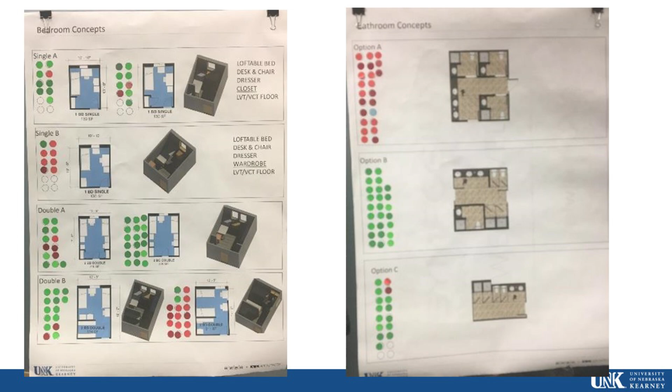This was a good exercise because it gave everyone a voice. I have been in many focus groups where a couple of strong-willed, gregarious people would control the direction of the conversation. Once we do this exercise, it could drastically change from the votes of people who were not talking. Once the votes were in, this would be a good catalyst for conversation.

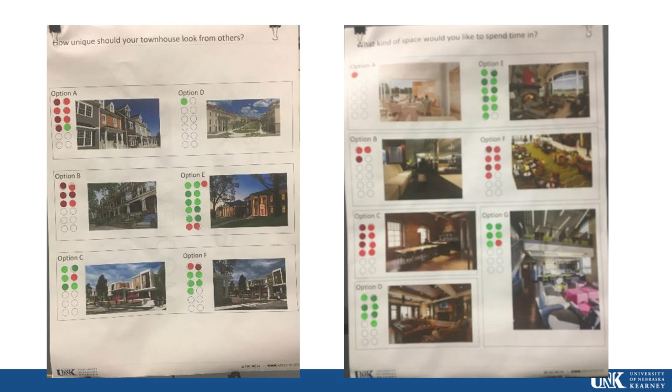The following were the top 5 comments from each of the constituent groups. Each group had their own important issues.

The Pan-Hellenic group was interested in large party opportunities. They wanted a large space for hosting events, and a catering kitchen for dinner parties.

The RHA focus group wanted to avoid having to share bedrooms with non-Greeks. I guess that goes into their exclusivity complaint.

The IFC group wanted to make sure there was adequate storage, going back to the ritual storage and the ability to store construction materials for homecoming floats, etc.

Student government groups weighed in and were interested, as were most, about having a dedicated entry and front porch. The front porch becomes this interstitial space where you can be between the public and your own space - the ultimate see and be seen space.

The housing board was concerned there was ownership of space. People from outside your group should not have the ability to wander through other group spaces.

Finally, the MGC group, which was a smaller minority group, had space for their group and wanted the ability to grow into one of the chapters. This was the incubator for the facility, if you will.

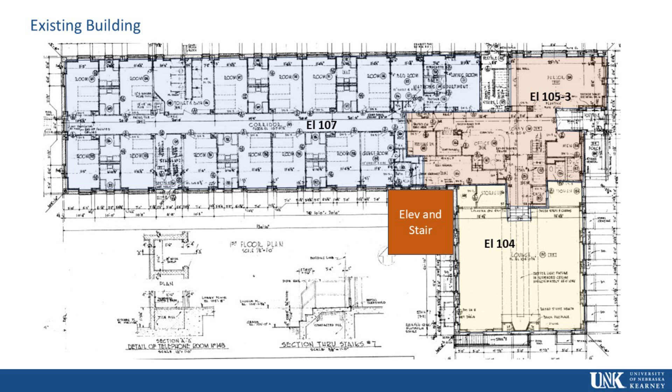The first floor had some challenges. This design prior to ADA had a series of levels on the main floor. It had a very nice large lounge which was down 1.5 feet from the lobby, but then the residential was a couple of feet above the lobby. What we decided to do was overframe on the concrete slab and align the lobby floor with the residential wing, and then have the lower lounge level accessed by a 2-sided elevator.

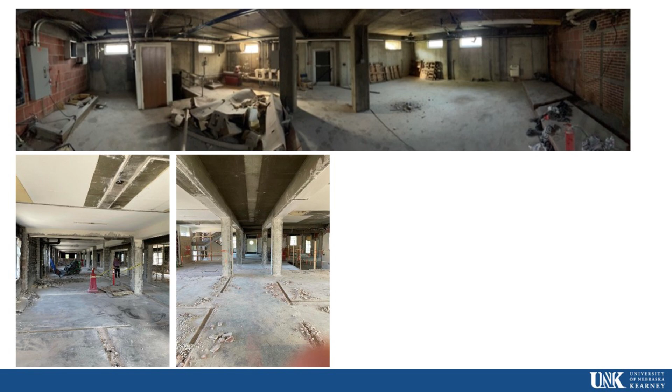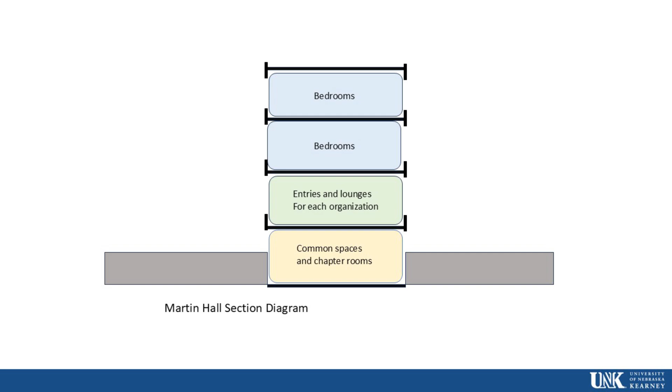The first floor is the main entry level for each of the groups. Where the existing building had one main entry, the new scheme provided entries to each individual group off the long side of the building. A continuous porch allows for ADA access to each of the entries.

Each organization will have an entry and a main lounge or living room, and a smaller study lounge off the larger lounge. They would then have access to an internal stair to go to the upper levels of their bedrooms. These townhouse arrangements also had an internal corridor common to all units, accessing the new elevator and stair. This corridor would also access the common bathrooms for public events in the Grand Lounge.

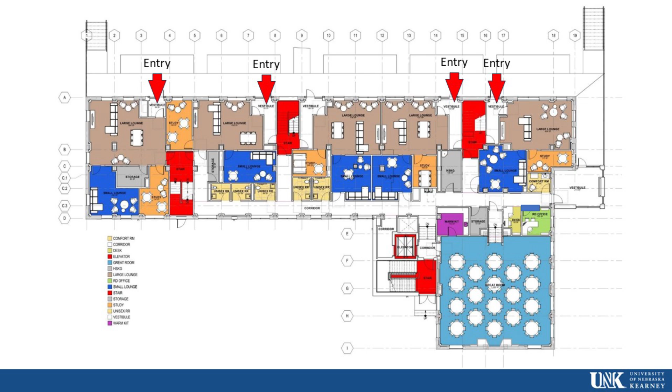We also utilized this new tower to provide ductwork for supply and return air for the HVAC system. The exterior of the elevator tower tried to harmonize with the architecture of the existing building.

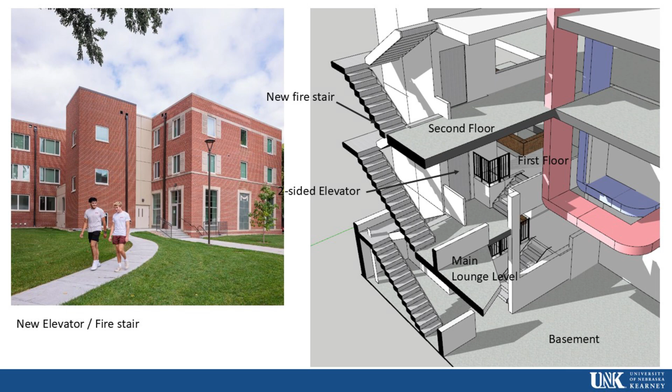The second floor provided double bedrooms and private bathrooms dispersed throughout the floor. An en-suite apartment is also provided on this floor. The second floor has doors in the hallway to allow each organization to have its own set of bedrooms, separated from the next group.

Finally, the top floor is an open corridor for maximum flexibility. Most groups could maintain the numbers to have the dedicated rooms on the second floor, but the third floor would allow them to grow or constrict, and could also be backfilled with the general student population.

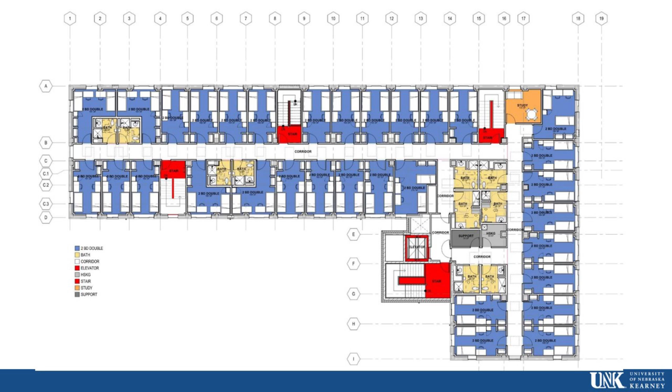These are renderings of the first floor concept, where each house would have its own front door and private living room lounge. This is an image of the entry concept.

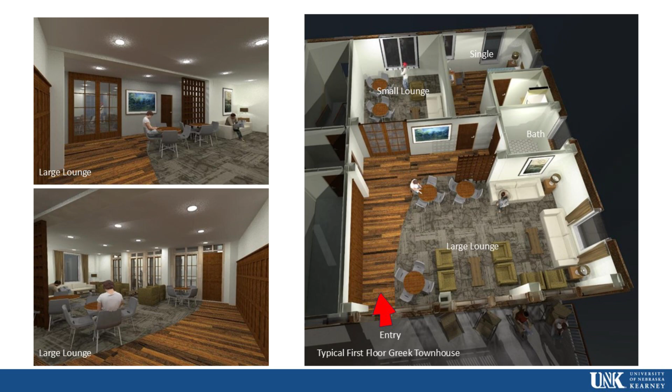A continuous porch would allow access to all of the front doors, and a ramp would provide access up to the porch level. This porch level is elevated to align with the first floor in the buildings. Originally this floor was about 3 feet above grade on the exterior. The elevated porch, while leading to ADA issues, did provide an elevated view of the common lawn shared by all of the organizations.

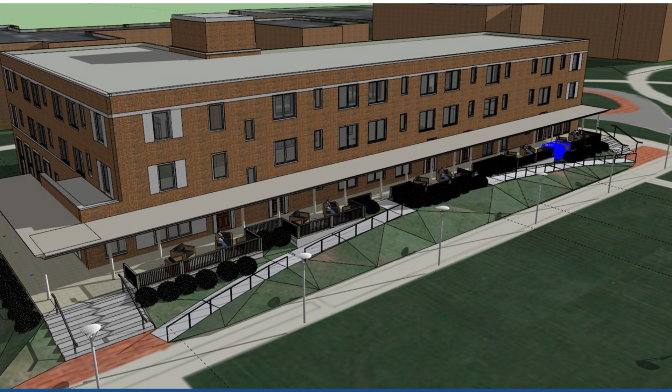This is an aerial view of the complex, with Martin Hall in the foreground and the new sorority hall at the top of the page.

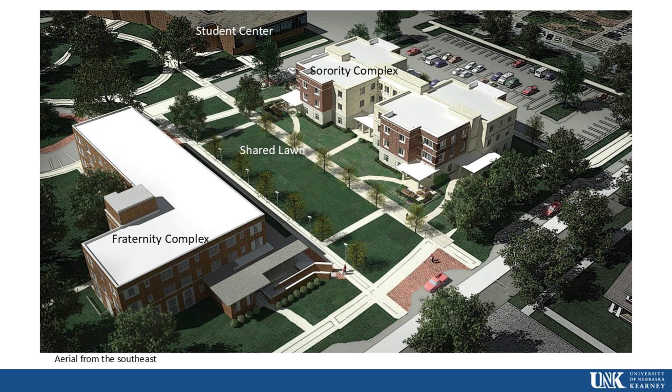There is a central lawn which was envisioned to be shared by both the fraternities and the sororities. This would allow greater interaction amongst all the groups. This new quadrangle is then anchored by the student center at the top, which would provide the dining for all the residents.

The building diagram for the sororities is like Martin Hall. The chapter rooms and shared spaces are on the lower level, with the main entries and lounges on the first floor. The upper floors, once again, are dedicated to bedrooms.

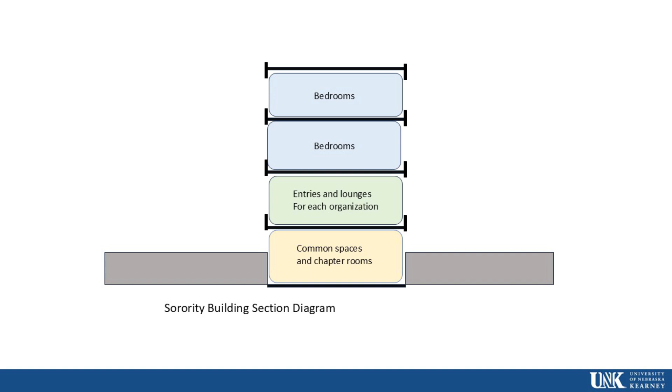This is the lower level of the sorority building. The chapter rooms for the 4 groups above, and smaller rooms for the MGC groups. Larger public bathrooms are provided due to the assembly occupancies on this floor. Not all the participants would have rooms or access to bathrooms up on the upper floors.

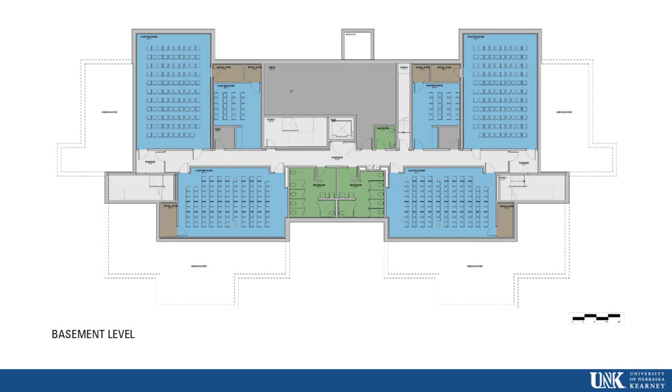This is the first floor of the sorority house. Once again, dedicated entries and porches, with access directly into their living rooms.